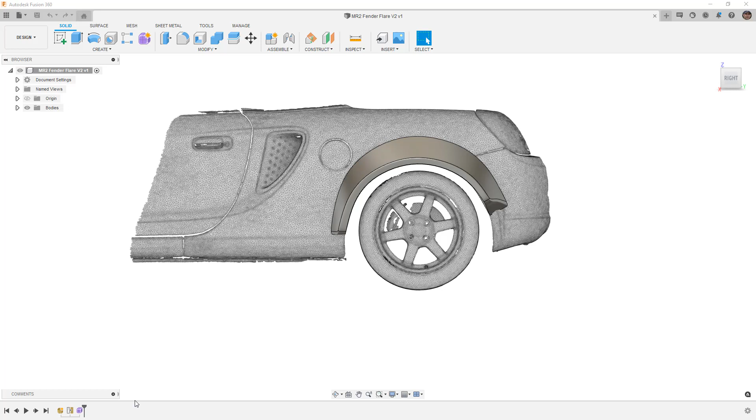In the last video in this series, we created a fender flare using Fusion 360 forms. Now, this fender flare was meant to be inspired by the typical Rocket Bunny style, where the fender flare doesn't come all the way down to the bumper, it sort of ends and you can see the tire from the back. I think it's a pretty cool style, it's very unique, and of course a lot of people are copying it, so why not?

But now I want to talk about actually going a bit more extreme than that. So we're going to hide the fender flare that we created, and we're going to start creating one that is more in line with the entire fender.

Now, remember again that the stock body has this sort of fender flare, and based on the comments, people are telling me that this fender actually entirely unbolts, which is not common for a typical front engine rear-wheel drive car. This is all going to be welded on or part of the unibody in most cases. So having this be able to unbolt is kind of cool.

But what we're going to do is take a look at making another sort of stick-on fender flare. And again, full disclaimer, when I record these videos, it's generally my first time through, so I haven't actually modeled this yet. So we're just going to explore the shape, see what we can create with no idea or intention to start with. So with that said, let's go ahead and get started and create another form body.

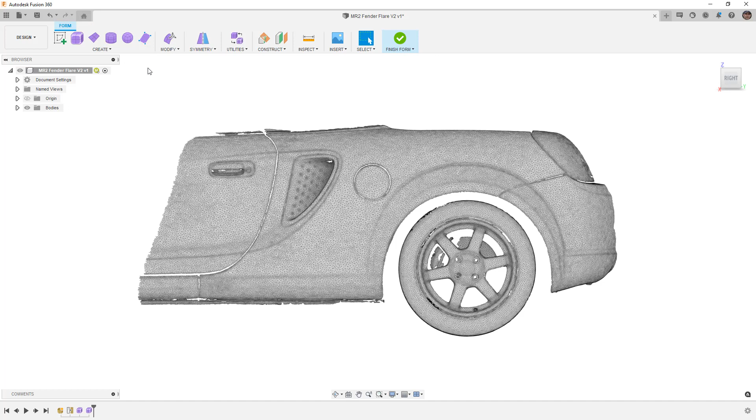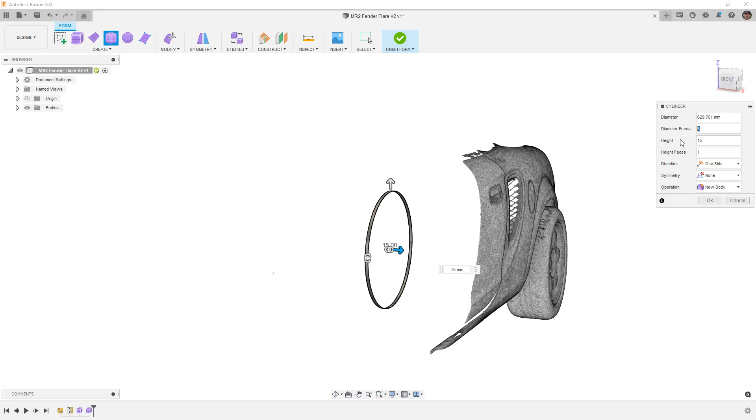So again, I want to start with a cylinder, and I want to build out the wheel arch. The same thing that we did on the last one, I'm going to set the height faces at 1. The height can be pretty small. I'm going to make it 15 millimeters. It doesn't really have to be very drastic, but I am going to increase the number of divisions. And instead of 16, I'm actually going to do 32. I'm going to go really, really high res on this one.

So from the front, I need to move that over, obviously, and I need to get rid of some of this. So I'm just going to box select, and move it over to the position we want. Now, since this is extreme, I'm actually going to take it out a little bit farther, and I want to make sure, at least for the time being, that I don't rotate this to match the tire. I want to leave it vertical. The reason is I want to make sure that I can make use of X, Y, and Z when I'm moving in plane. As soon as I start to rotate things, at least at this stage, it's going to make it more complicated.

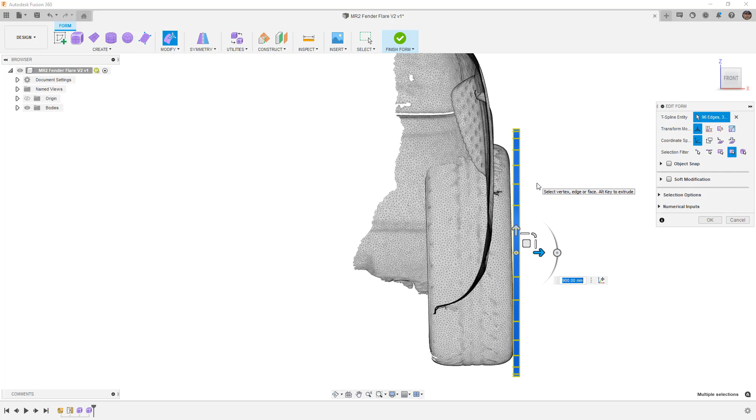But I am going to stick this one out just a little bit further. And of course, we can take the mesh and we can pull it out further. But again, a little bit more extreme, a little bit wider. It's going to accommodate probably like a 9, maybe even a 10-inch tire, very, very tightly tucked. So that gives us a good starting point. I'm going to click so that I can deselect that.

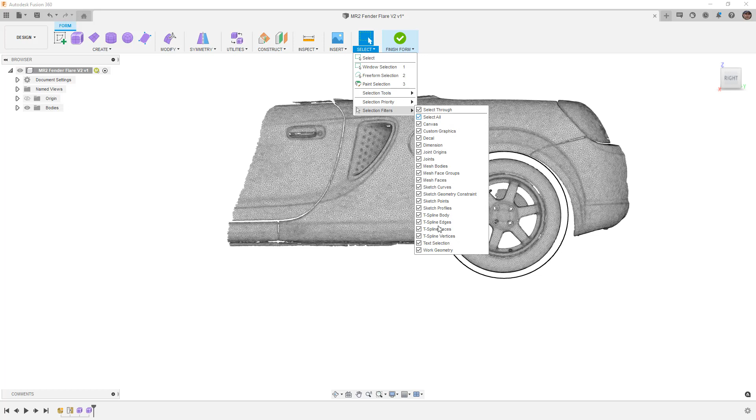And again, when we are selecting, we want to make sure that our selection filters and priorities and our tools are all based off of what we want to select. So if I get out of the edit form dialog and go to my filters, you can see that we have mesh bodies turned on, which means that we can actually select this. But when we go into edit form, the mesh body is not selectable. So if you're trying to pre-select anything, make sure that you expand and go to your selection filters. When you're in the edit form tool, you're not going to be able to select the mesh body anyways, but just keep that in mind.

So on this one, what I plan to do is come all the way down to where the side skirt or the sill would be. So we're going to come up to this seam here. And I think what I want to do is carry it around this intake.

I don't know if I'm actually going to incorporate the intake or not, but I want to go to this upper portion. I want to go around the intake and come down to here. On the back side, I still want to leave some of it open. I don't want to come all the way down to the bumper, so I might take this up to the body line here and leave the stock bumper. That's just my initial thought. I'm going to look at just the fender portion, and of course we could add or create another extra little piece here. Let's just see how it goes.

The reason we're making that determination is we need to figure out what to delete. So I want to select and delete that, and then I probably want to get rid of a couple more faces.

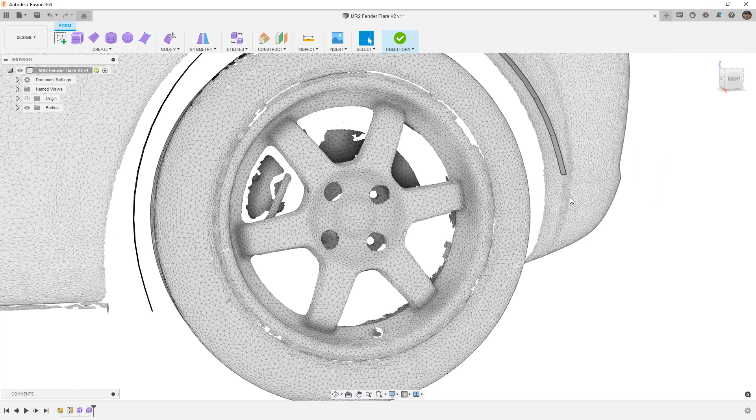Let's view this from the side and see where that lines up. It looks like maybe we can come to that line on the bumper. That might be a good line, at least for right now. It's a good idea for us to keep a little bit more and then adjust it later if we want to. So I'm going to go back to edit form.

Again, like we did before, I want to start manipulating the shape to be a little bit closer to the wheel arch. Generally I work in box display mode, at least at the very start of a design. For this, because we are dealing with a scan and I want to position the wheel arch in smooth display to match that scan, I am working in smooth display.

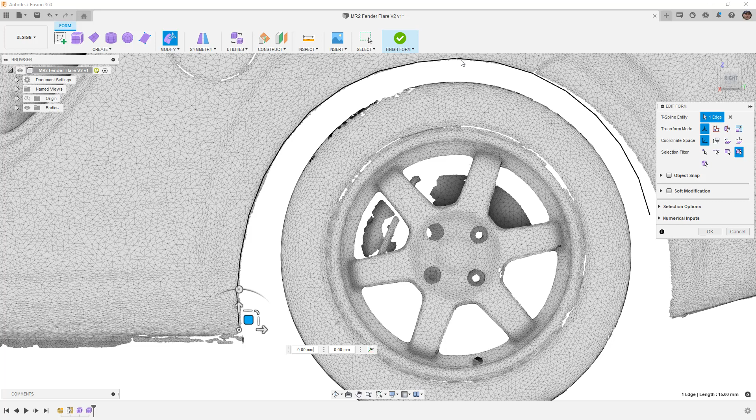It's not something I typically do, but to get the shape close, we want to use the smooth display now, and then we can always switch to box display and clean things up and make it a little bit more symmetric. It's hard to do right now with just this thin lip, and that's something we'll obviously need to spend a little time on. But this is a starting point, and we can always remove or add edges and clean this up later if needed. In general, if we were designing the car body from scratch, we would do an extremely low polygon count, extremely low face count, and then sort of add to it from there.

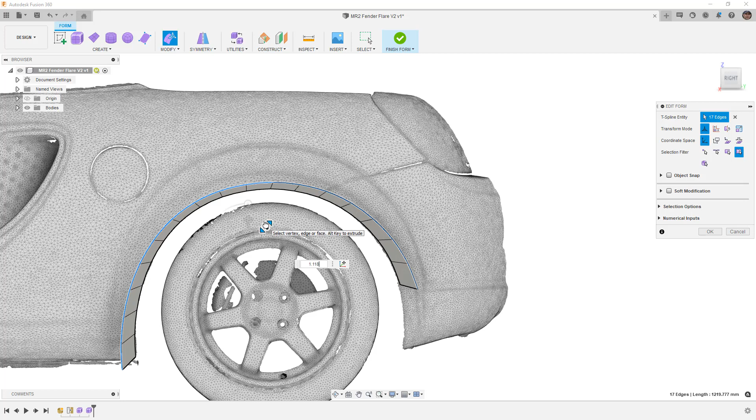Now that I got the starting position of where I want that wheel arch, I'm going to double click the outside, and just like we did before, Alt and Control on a PC, and it's going to be Option and Command on a Mac. I'm just going to pull that lip out, and I'm going to make it a little bit bigger than we did last time.

Then I'm going to continue manipulating these. Again, the intent here is to keep them a consistent width, and I also want to make sure they're pointing toward the center of the wheel. So that's going to be my reference for all of these edges. You'll note that as they start to point a little bit more extreme, the shape kind of works itself wider. It's not quite right.

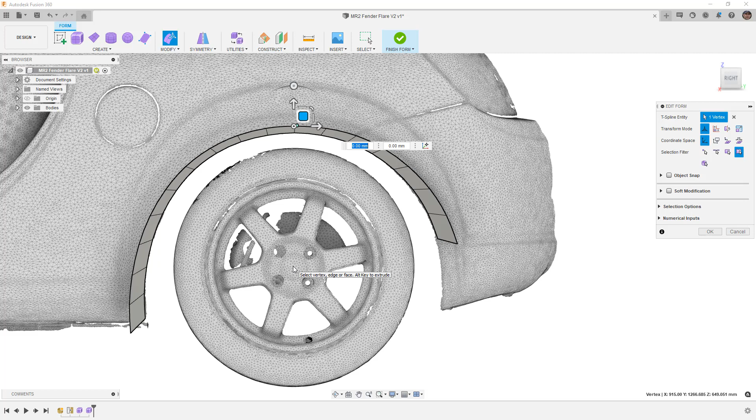Part of that is because when we're extruding, what we're doing is extruding from our selected edge. There is actually another way if we have a selection point that is in plane with the wheel. Let's go ahead and Control Z to undo and let's explore that.

So I'm going to create a sketch. I'm going to use the side plane, and what I want to do is just put a point where I think the center of the wheel is. So I'm just going to place a point right there. Again, in this case, this is the mesh where we actually raised the wheel up 30 millimeters to lower it, so that's about where I think that is. I'm going to finish that sketch, and notice that the sketch point is here.

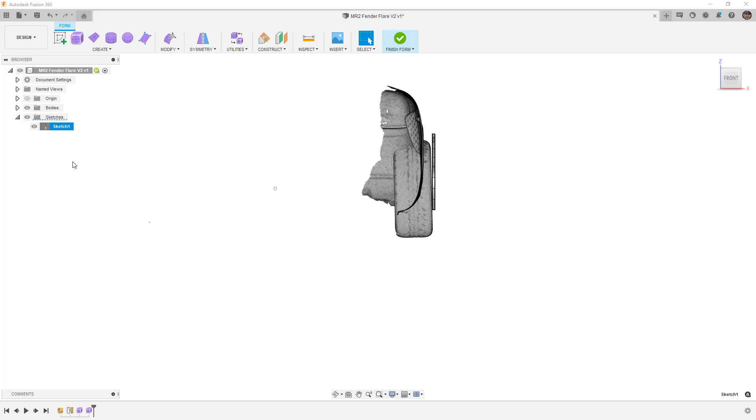So if we use this as our pivot point and we extrude out, it's going to completely go the wrong direction. It's going to go from here and go outward, so I actually want to move that sketch. We can do this inside the sketch as long as we right click and edit the sketch. So as long as we're inside of the sketch, we can move that point if we have 3D sketch turned on. I'm going to select the point and hit M for move.

And I just want to bring it to the location where it's matching the end of this. You can see it's 915 millimeters, that's where it's going to end up. I'm going to say OK and finish the sketch.

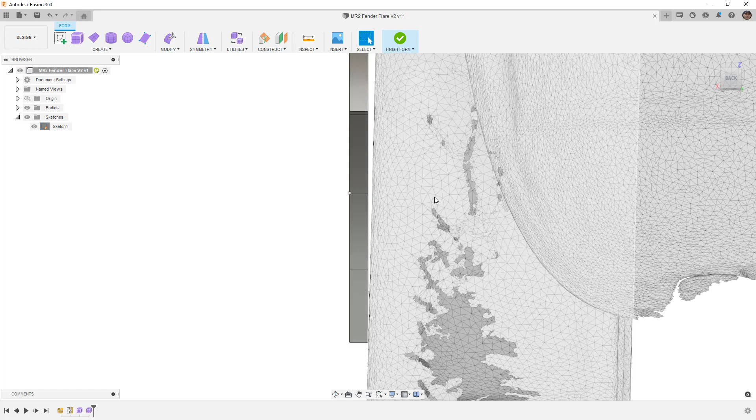Now theoretically, and this is the first time going through this, but theoretically if I set my pivot point there, I won't have to do a lot of post-processing on that extrude. So let's go to the right view and do Alt and Control. You'll notice it's kind of moving out how I would not expect.

So before I extrude, I'm going to set the pivot point to here. Now I'm going to hold down Alt and Control, and you can see now I'm getting that very smooth, consistent result, everything is pointing directly to that. It just saves me a little bit of time having to do it manually.

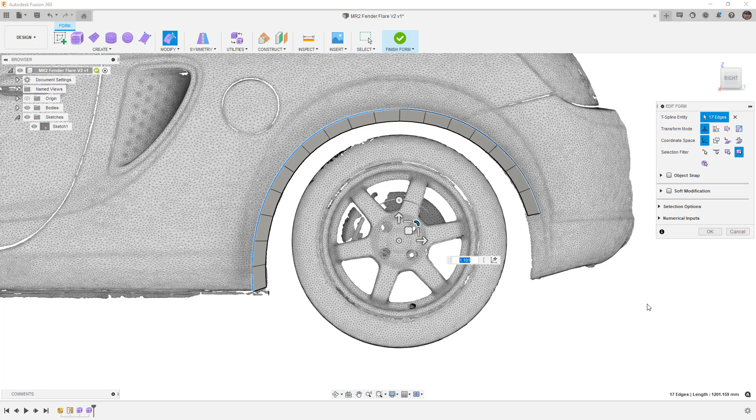It's more consistent. When we did it originally off the selection, you'll notice the upper sections were much thinner and these lower sections were quite a bit wider. So this gets me closer, and I can of course do some manipulation and get it more in line with what I want, potentially change the shape over here. But for right now, that looks pretty good.

And now we've got our lip. This is not to say we always have to have a lip like this - in some cases we might want to actually smooth that out and roll it. But almost every car is going to have some sort of crease here, and adding that extra detail and edges to control it this time is just more work than you need to do. So keep it as simple as possible at this stage. I know we've got a lot of divisions here, but keep it as simple as possible.

Now that we have this starting point edge, the way we did this before was we held down Alt and extruded it and built out our fender flare. That is not going to be the process this time, because we're going to have a more intricate shape. We need to determine if we just want to push everything out and maintain some of the stock detail, or if we want to make extra intake scoops or make it pretty wild.

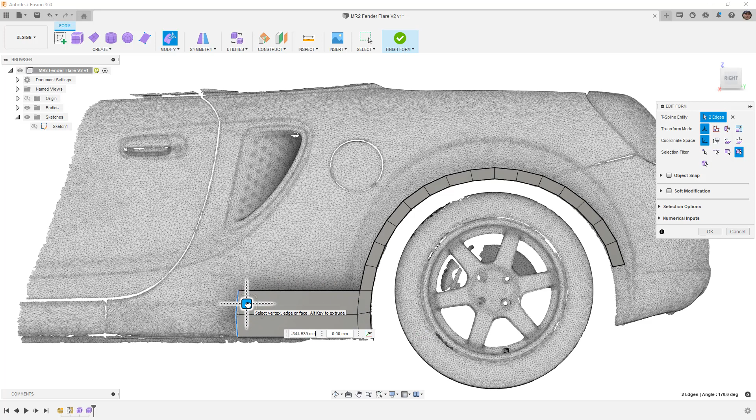So at this stage in the process, this is when I'm going to go into box display and begin building this out piece by piece. I'm going to take these lower two edges, select both of them, hold down Alt, and bring them forward. I'm going to place them at some point - I don't really know what the shape of this is going to look like yet.

Before I finish this up, I'm going to start to scale them to get them in vertically. One of our subscribers mentioned that you can just hit 0 in the dialog box, which is something I honestly have never really done before - I've just manually scrolled it close. So just hitting 0 will get you close to that value and get it actually vertical. That's pretty cool, you can go ahead and do that.

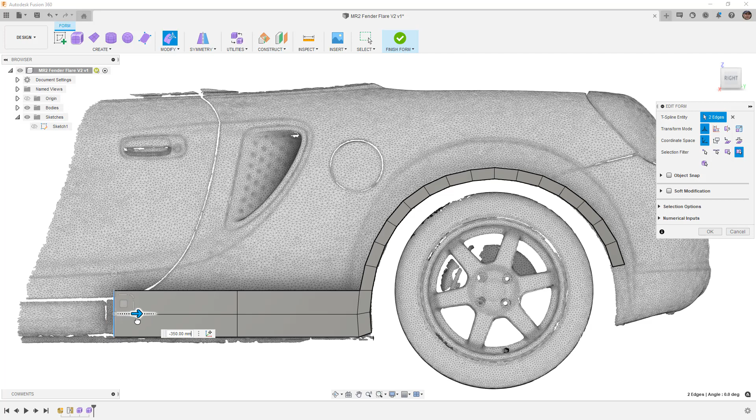Next, I'm going to hit Alt and do this again, just extruding it forward, and go pretty close to that edge there. I just want to bring it close to that edge, and that's going to be sort of our defining shape.

Before I start to scale this stuff down and fit it to the door, I want to go to a top or front view, and obviously that is not going to work - we need to pull it in closer to the body. So I'm going to take those edges and pull them in fairly close to the body. Again, it doesn't have to be perfect, but that looks pretty good. I want it to be just a little bit in front of the mesh. And then we're going to take this one as well.

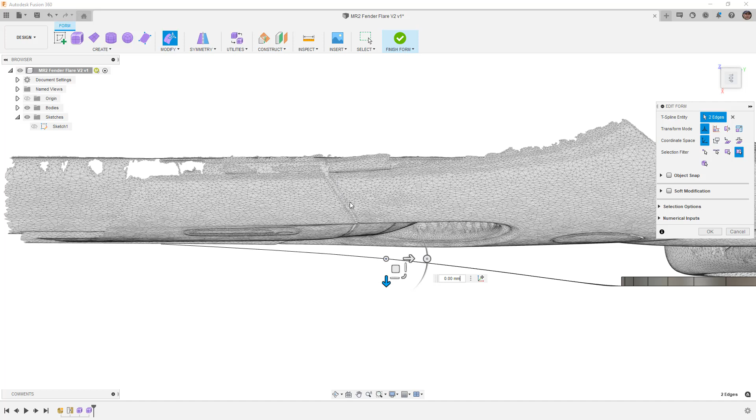What I'm looking for here is really going to be driven by how we want the shape of the fender. In a lot of cases, I say we always want to maintain those straight lines, going from one point to the next to maintain those lines. And while that's true, in this case, when we're looking at it from the top, what we're doing is figuring out how we want to flare this out. Now we're going to be going from the door seam, and we're going to be building out.

So I want to keep it kind of close to the body here, not exactly in line. And then I want it to begin to sort of flare out and widen, have it be a much more drastic look. So that's a good starting point there.

The next thing I'm going to do is select both of these edges and begin scaling them down. Here's another thing we need to be mindful of: if we want them to be scaled from the bottom, if we want to keep that bottom position exactly the same, this is the time where we reset our pivot. We put the pivot at the bottom, and then when we scale them, they're just going to move down vertically. If you need to keep the bottom, the top, or the middle at a specific location, you just set the pivot point there.

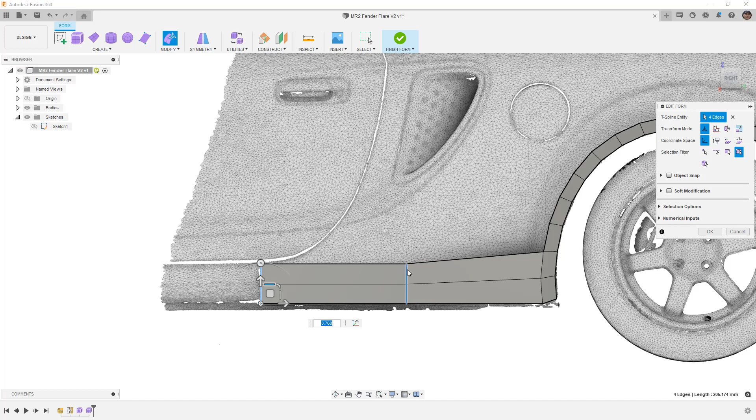The reason we would want to scale them vertically or make them shorter vertically is if we want to have a more drastic side skirt or something. I'm going to assume in this case that we're just going to keep them about where they are, but that's why we would do that.

As we look at this from the front, notice that this bottom edge is quite a ways away. So I want to begin pulling this in, and note that we are starting to make that shape as it flares out. And the center one here, I'm going to view this from the front, and I want to pull this one in as well.

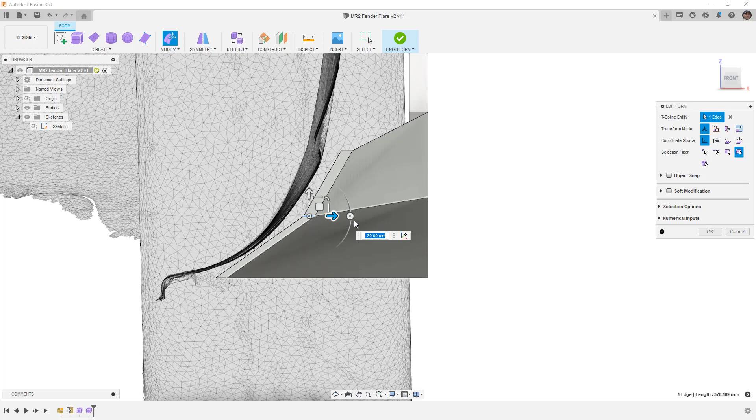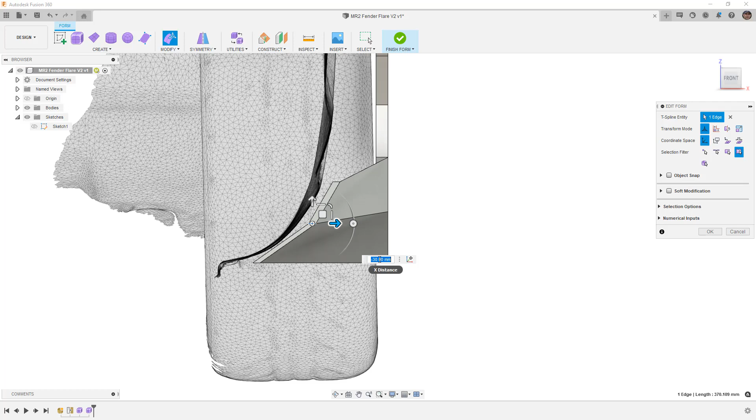One thing to note is when you're using just the arrow, it's going to snap at certain increments. So if we're looking at it in this view where we've zoomed in about this much, it moves every 5 millimeters. If we zoom in further, it moves every 1. If we go further back, it's going to move in 10 millimeter increments at some point. Just keep in mind that your zoom level is going to determine that. It's not true if you're moving in plane, but if you are moving here, then it is going to determine that. Of course, you can manually enter it here, or go into numerical inputs and add it there as well.

But we're going to be doing this manually. Let's take a quick peek at smooth display, and you can see that it's sort of rolling out. We will add some more detail on the bottom of this, but you can kind of see it's rolling out.

Because of the curvature we added at this position, I'm going to reset my rotation to that point by clicking the middle mouse button while holding down Shift. You can kind of see it's twisting and flaring out. At this stage, we're just looking for rough shapes, rough concept shapes, so don't get too hung up on the details and how smooth everything is. Just remember that we're building these out.

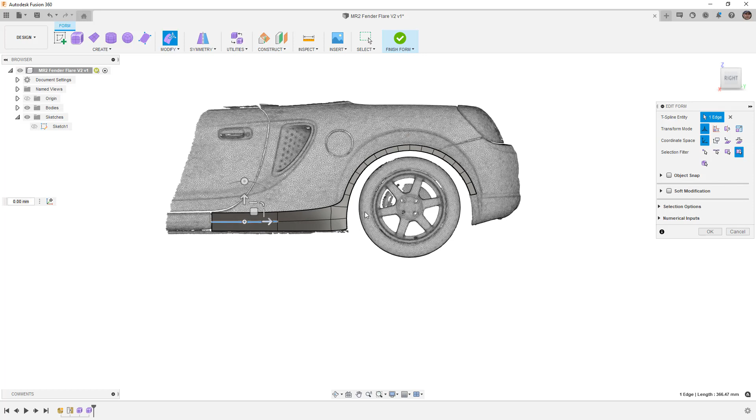Now at this stage, we need to figure out if we're going to continue to extrude away from our lip here, or if we want to actually create some new faces and eventually add them here. I think the best thing for me to do is to start building some new faces and not try to extrude all of this out. You can do it both methods, either way is perfectly fine. We could also start with a big broad shape and then begin dividing it up. Again, any of those are going to be fine. It kind of just depends on what you're comfortable with.

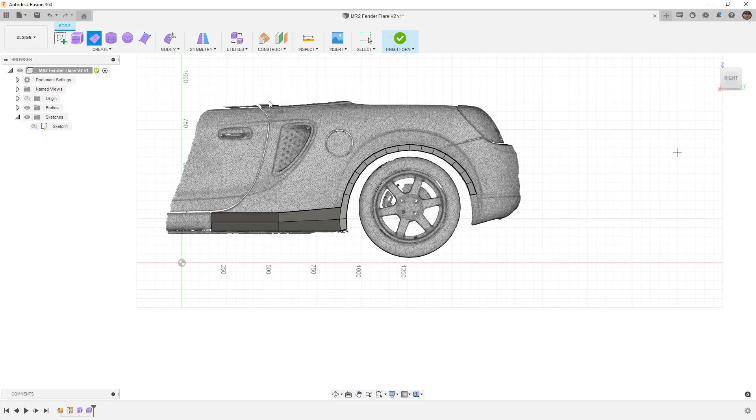So for me, I'm going to start with a plane. Actually, you know what, let's cancel that. I'm going to cancel the plane and start with a face instead. The reason I want to do this is because the face will actually let me snap to the mesh, which is a pretty cool feature. So using face, making sure that we have object snap on, notice that there's an offset amount. What I'm going to do is start building directly on this mesh.

So I'm going to come to here and I'm going to just bring this out. I don't know the number of divisions I need yet, so I'm just going to sort of start building this. I'm going to come from here and keep building out at least a few faces.

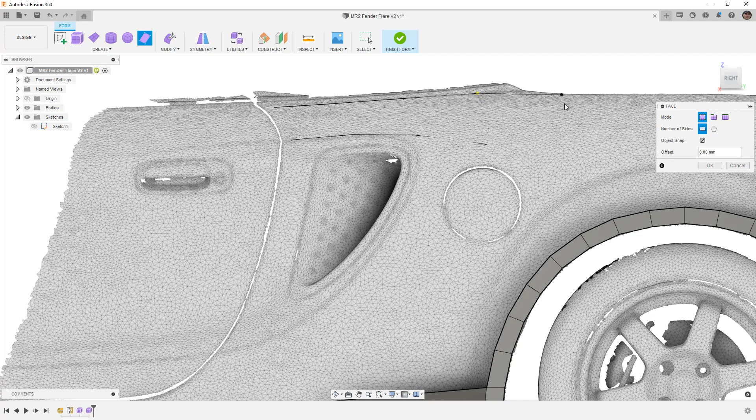I know that I want this shape to start getting larger here, and that's going to be a product of how we're going to control the curvature. I'm going to come to this point, come down a bit further, find that point there, and I'm going to say OK at that stage. It's hard to tell because it is hidden a little bit in the mesh because we don't have curvature to work on that.

But now we're going to go to modify, edit form. I'm going to select this body. I'm going to go to a front view. And even though I built it directly on the mesh, I'm just going to pull it out a little bit so that I can see it and go back to my multi-selection. So again, this is a quick way. That way we don't have to create the plane and then move it into position and reposition it. Using the face option when we have a reference mesh can be a little bit quicker.

So now we've got the rough starting shape up here. This one's in box display, this one's in smooth, so I'm going to use Alt and 1, and that way I am in box display on this one as well. Again, don't worry about the fact that it's going underneath the fender. We're going to take care of that when we add more divisions to the shape.

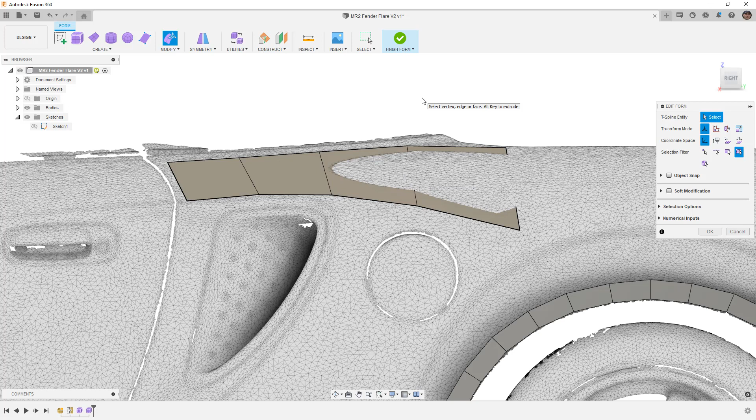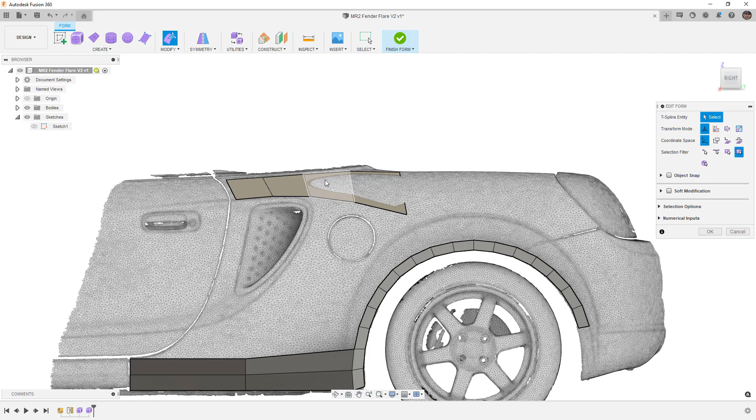So here's where we need to start thinking about what we're going to do with this shape. We got these little pieces here, which eventually, again, I said in this version, I might just do a bolt-on or a stick-on fender flare. And this is one where you sort of trim away and you leave a little bit. Just because it's going to be a little bit more difficult for us to create one that's attached. And we certainly can. But again, some of the bolt holes are here, but I don't really know how that interface happens at the top.

So most of these were Spyder or hardtop convertibles, and I'm sure that there's some hardware underneath this lip here, but I don't really know how that all works. So I'm just gonna work off of the scan that I have here, and I'm gonna keep building. So we're gonna carry this down. We're going to bring it down and start to build out where we're going to attach to the body, because that's obviously where we need to meet the body lines and match them.

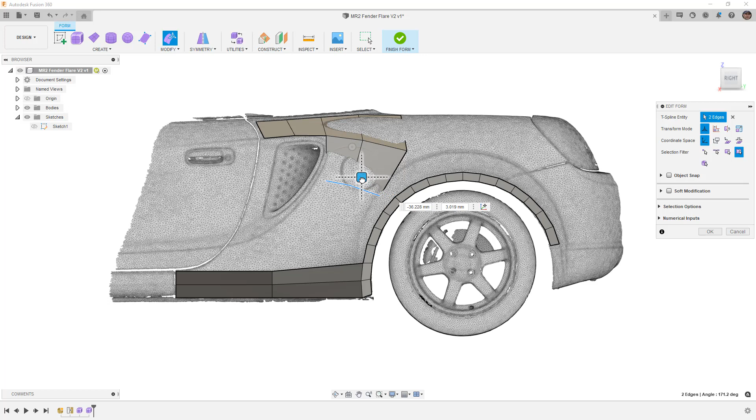So I'm going to start with these two edges, and I'm going to hold down Alt, and I'm just going to extrude them down. And then I want to scale them in a little bit. I'm not worried about pivot points at this stage because I don't really know what the shape is going to look like. And I'm also not going to be too concerned about just moving in X or Y or Z. I'm just going to begin getting it close, because remember, we're going to have to use pull to actually get this in the right position.

And I think in order to match that shape, I know that I'm going to need more divisions. So I'm just going to go ahead and make that call now and put this about where the factory wheel arch is. I'm going to take these two. Let's go ahead and extrude this down.

Another consideration that we should be thinking about at this stage is how and where it's going to attach to our fender. So obviously we have a lot more divisions on this lip, and that's eventually what we're going to get to on the shape of our body. But at this stage, we obviously don't have that. We would need to divide this one up here, and then we would need to bring this down. But the problem with that is it's going to be much harder for us to create the general shape that we're looking for. So even though we know that we're going to need more divisions, at this stage in the game, we're going to keep it very general.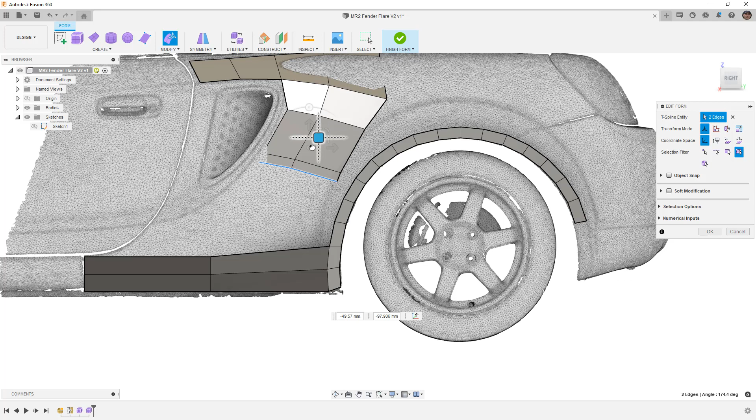So we're going to extrude again. This one you can see is starting to go into the body. So I'm going to switch to a front view, and I'm going to just pull it out a little bit. Note that some of these edges, like this edge, could go back. This vertex could go back because the fender's rolling back. Again, very general shape. We're not getting super detailed at this point.

But as we start to get down, this is the stage where we really, really absolutely have to start thinking about the layout of all of these different quads. Eventually we're going to have to probably have some triangles somewhere. But at this point, we need to think very clearly about how we're going to end up transitioning this forward.

Because if we just take these two edges and we extrude them forward and we rotate them and we scale them down, we can begin to sort of create this shape. But then we have to begin to really think about how it's going to connect to this and how it's going to connect to this. So there are two options. I'm going to just go back to this point.

There are two options. One is that we can take this one straight down, which means that this vertex will connect here, this one will connect here, and we'll split this one in the middle. And then we'll have to split this down the middle, we'll connect there and there. And then we begin extruding forward. Now what that means is we're going to have a star point. We're going to have 5 intersections that happen here.

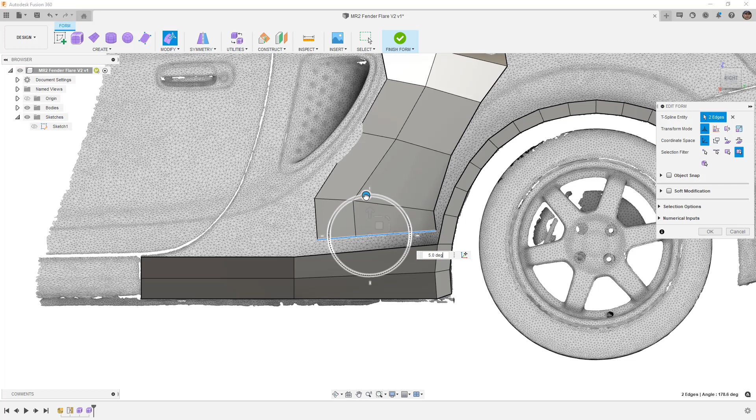So this is a very blocked out design, and honestly at this stage I don't have a vision of which one will be a better choice. So because I don't really like twisting these shapes, what I'm going to do is I'm just going to carry this down. I'm going to sort of scale it to get it close, maybe rotate it a little bit. But I'm going to assume that then taking this face and extruding it forward is likely going to be the better option for me. I don't know that, and that's just one of those design decisions that you are going to have to make along the way.

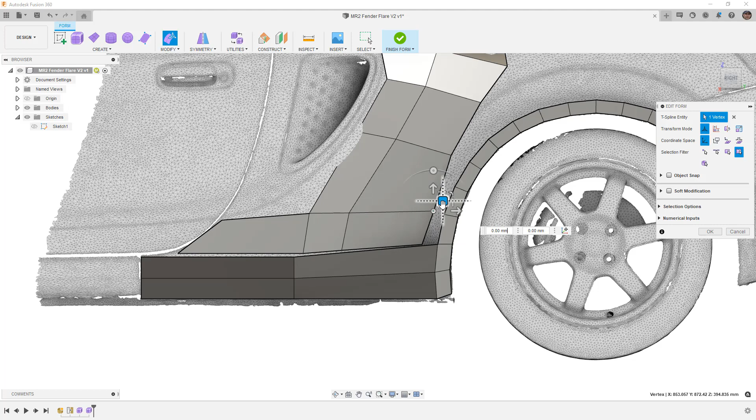So not knowing that at this point, I'm just going to make the call, make the decision to go forward with this method. Now, it might bite me later, but I won't know until I try. So now we've sort of got the general shape of this, and you can see that we're sort of building it and we're working on the patch from the side. Now I want to begin to sort of get some of these edges where they need to be. So I'm going to begin pulling some of them out. Again, very general. We're not getting real specific yet. We're just getting them about where they're going to end up, so we can start to visualize this shape.

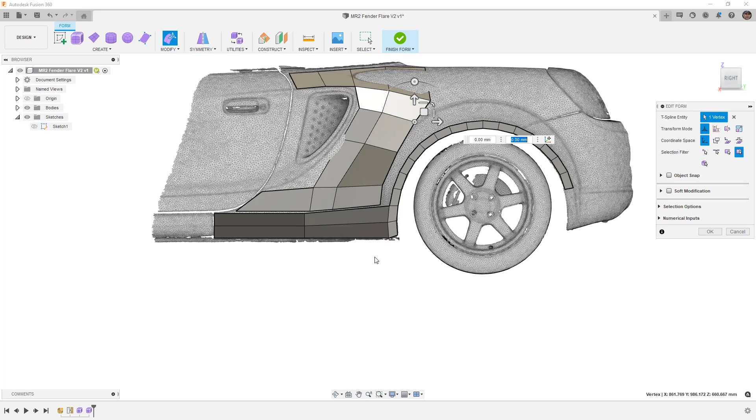I'm going to scale these together. Again, just get them kind of close. I'm going to scale them vertically. And what's going to happen is we're going to start dividing this up once we're happy with the shape. So we'll put a division right in the middle here. We'll put one right in the middle here. And then this vertex will connect here. This vertex will connect here. And we're going to end up having that star point because we're going to have to sort of change directions.

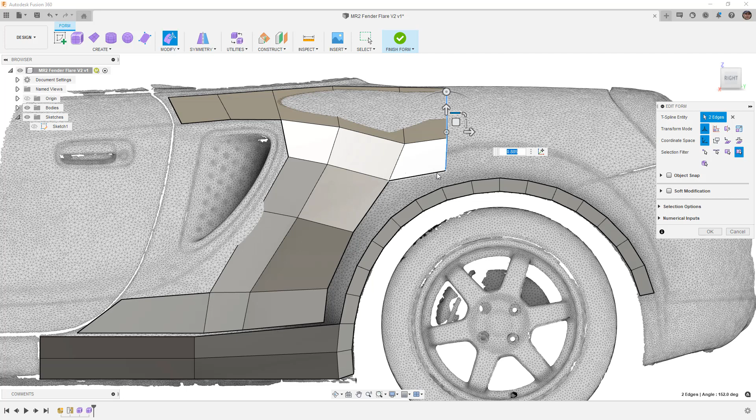The other option, or the other thing that we need to consider, is we might have a patch or a face that's 5 sides, so an n-gon, or 3 sides. We might have a triangle in there. Now, the reason that we would do this is, we just kind of have to think about how the shape is going to progress. We're not quite to that point yet.

At this stage, I'm going to rotate around to the back. Notice that this stuff is still very close into the body. We only really need to keep it up close to the body here. So I'm going to begin taking this edge and this edge from the back, and I'm going to start pulling them out. I'm not spending a lot of time at this stage really worrying too much about exactly where everything is, because it's messy at this point. And the reason it's messy is because I don't know what the shape is going to look like.

Once we're happy with the shape, that's when I'm going to start to take things like this vertex and I'm going to pull it up, and I'm going to try to get more of a straight edge here. And ultimately, what'll probably happen once we're happy with the shape is I'm going to end up deleting some of these edges and just adding ones back in that I know are very clean geometry. But again, right now it's the concept phase. In the concept phase, it's going to be messy. We're going to play around with the shape a little bit.

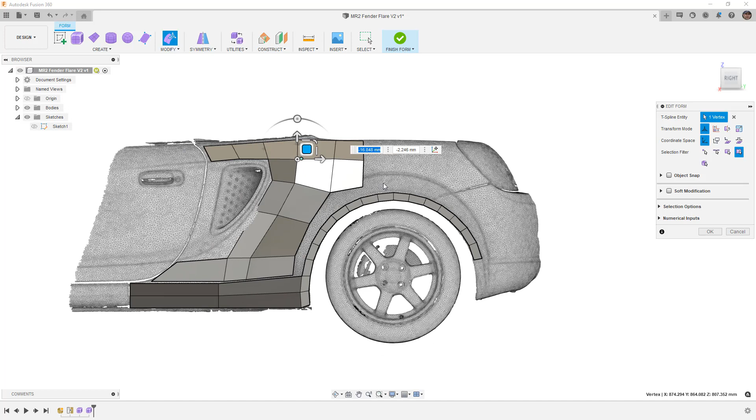And if we didn't have the scan data, if we weren't building off of an already pre-existing car, then the process is different. So I think it's important that we make sure that that's clear. If we were designing this car, we would have much fewer patches, much fewer faces, much fewer divisions at this stage, and we would add them in later. Because we already know the shape of the car, we know what we're attaching to, that means that we've got a little bit more to start with.

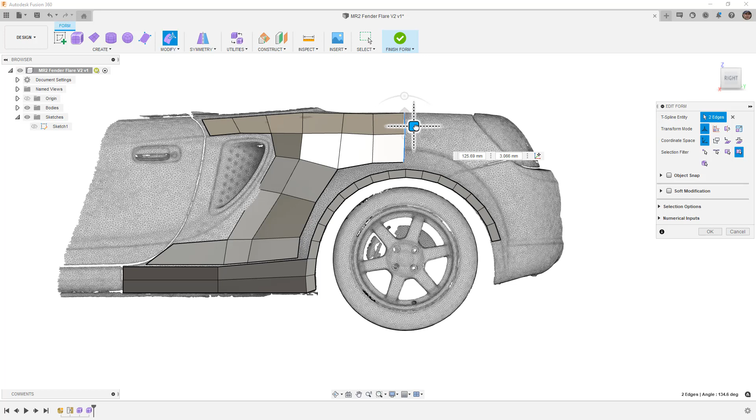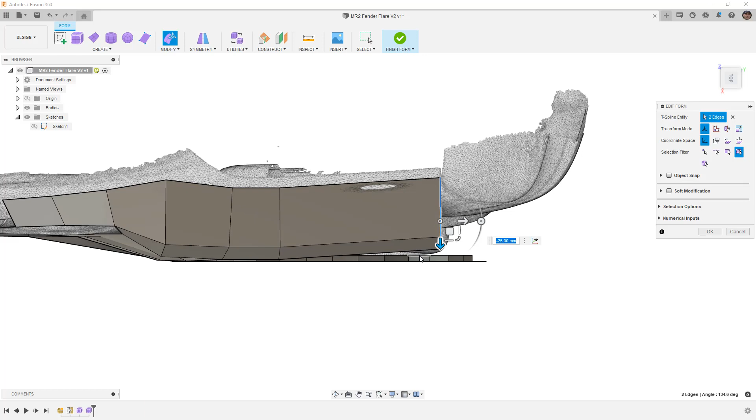So next, I'm just going to keep carrying this back. And again, you'll note that at this point, I didn't use just along Y. I'm just bringing it back. And I am keeping in mind where these things are going to connect. So remember that the broader the shape we have, the easier it's going to be for us to control. And then later on, downstream, we'll come back and we'll add a bit more to it. So for example, this edge, I'm going to pull this edge out. Again, keeping with the fender flare, but this one goes back toward the car body. Big, broad shapes, and then we'll divide them up later once we're happy.

And actually, with that in mind, let's go ahead and go back to a right view. I'm going to take this edge, and I'm going to delete it. And the reason I'm deleting it is because this is a much cleaner shape, and I don't need to worry about all those divisions. So if I try to make this a smooth display, we've got some pinching going on here because we need some more detail, but we can kind of start to see the shape building out. So we rotate this around, we're flaring out, and we're starting to build the rest of the shape.

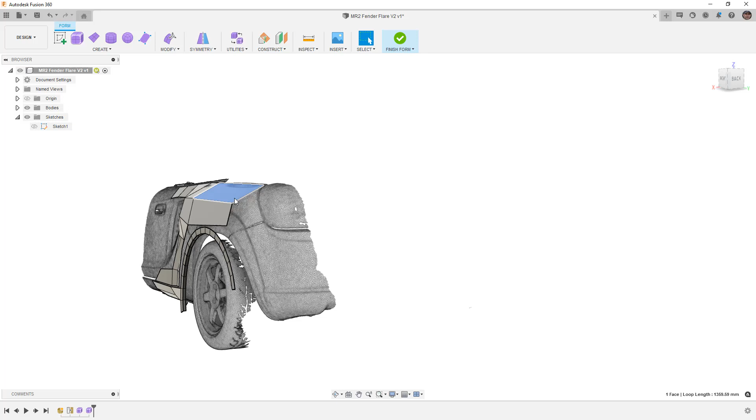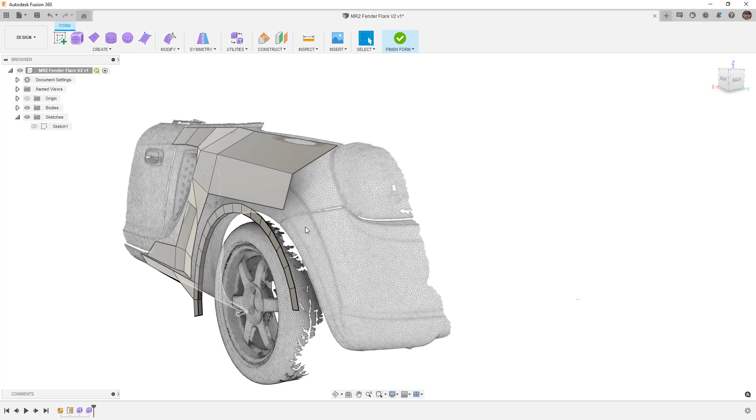As we get closer to the back of the car, we need to think about where and how it's going to terminate. So if you look at some of the DTM cars or some of the old race cars from the 80s, especially Porsche like 924s, they had these massive over fenders, and they still had the stock body underneath, part of the homologation rules, I think. And so, you had the original taillight, and then you just sort of had this big opening in the back. And I kind of like that look. I'm a fan of the cars from the 80s, the big boxy sort of flares and that sort of design aesthetic. So I'm probably going to continue on with that.

So we're going to have this big over fender that's going to connect back to here. But then we're probably going to leave it open at the back so we can kind of see inside of it. Again, just a design aesthetic thing, just from what I like. Obviously, if you want to connect it back to the body, you do something very similar like this.

So we're getting closer, and what I want to do at this point is I want to carry this edge, the shape of this edge, I want it to be more in line with the taillight. So I want to select it, and this is one of those cases where we are going to reset the pivot point to the top, and then we're going to use rotate and scale. And what I'm looking to do at this point is I'm looking to rotate it and keep it so that this point is where it stays or where it's supposed to be.

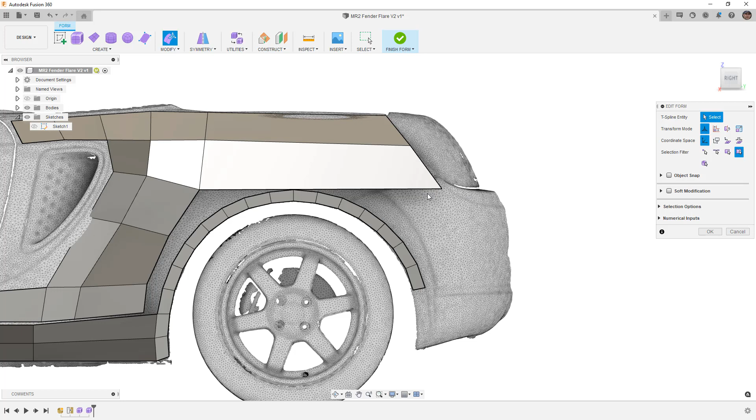And then I also want to try to make sure that this is fairly horizontal. So that looks pretty good. Obviously, with no divisions here, we can't continue to extrude down, but the shape at this point is starting to look pretty good. I like the shape. I like where it's going.

Now I want to spend a little bit more time fixing this shape here before I start to add more divisions. And a way that we can do this is if we're happy with this front edge, we can go ahead and double click on this and simply delete it. Now, if we double click this edge, or if we make some selections here, it's a little tricky because this edge doesn't carry all the way through, but we can come to insert edge.

I'm going to put it at -0.5. And it looks like we're going to want to select this edge here. We're going to have to do it manually just because of the way that the loop is laid out. And we're going to do a simple single insertion. And you notice it didn't work. Let's try again. Let's try insert edge. Let's try if we do +0.5. Okay, now it's showing it there. So now we've added one that's exactly in the middle.

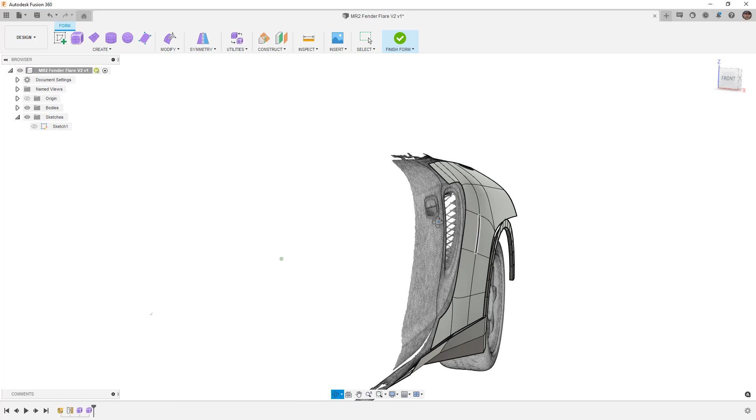And what this allows me to do is go to insert point. And I can go from here and I can find the midpoint of that edge. And I can repeat that process down here and just find the midpoint and say, okay. So that was a lot easier than us spending the time to try to get it nice and even. And this will give us a better result, honestly. The smoothness that we'll get from this will give us a better result. Let's go ahead and go back to box display. I haven't saved this, so let's do a save, make sure we don't lose anything.

So as I step back and look at this, I think that this edge needs to be higher. So what I'm going to do is I'm going to take this one and I'm going to delete it. I'm going to take this edge and just move it up vertically. And that's about where I want it. I'm going to reset the pivot point to here. Then I want to scale it down so that it matches the taillight shape pretty good. And then I want to go to insert point, and I'm going to go from here to here.

And that doesn't look very good. So I want to actually take both of those. I'm going to delete them. And then I'm going to go insert point from here, and I'm just going to go straight across and add that back in. So again, deleting and adding those edges and the insert points are going to be important.

So there's a pinch that happens here. And again, when we look at the reason that these happen, it's just because at this point, we don't have enough additional geometry to help control the curvature. So we need to divide this up and we need to clean it up a little bit more. But I think before we get into that, I want to start to try and connect it to the rest of the car body. And I think that's going to be an important thing at this stage.

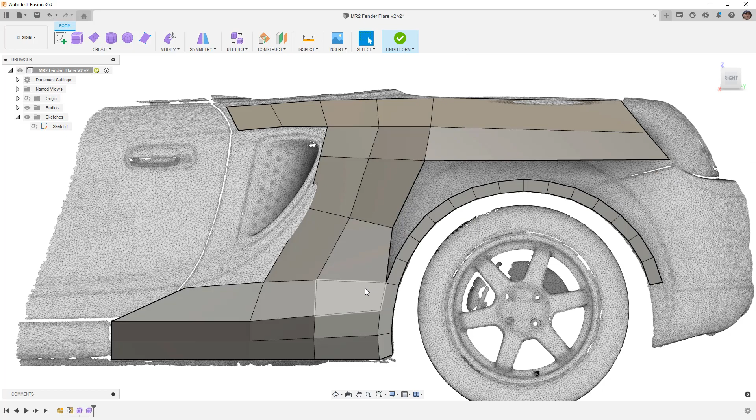So I'm going to insert an edge right in the middle. And then I'm going to start to use weld vertices. So I want to bring these out to the skirt where it goes. And I'm going to take this one here. And let's go ahead and take this one to here. We'll take that one to there. And we're going to stop there. Now this is probably going to prevent me from going back into smooth display mode. No, it still is able to do it. So now we're back in smooth display.

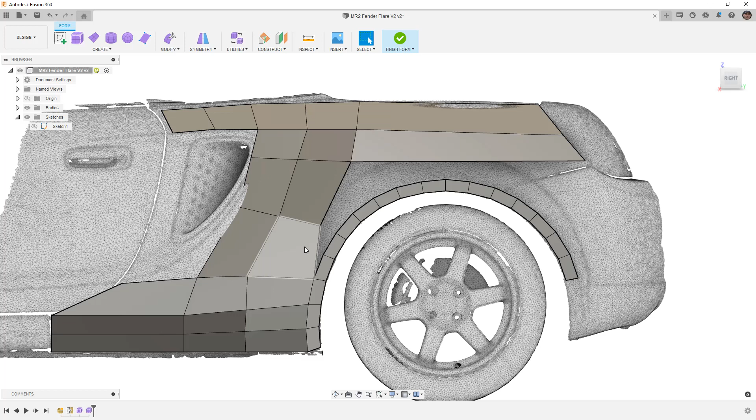We need to work on everything else that connects this together. So this section here, if we're happy with the shape, what we want to do is we want to use insert edge exact. If we think that the shape could still use a little bit of work, then we would come back and we would just use simple, and that would be fine. But I'm going to continue to work my way around the fender and figure out where things need to be.

So insert edge, I'm going to go here, and I'm actually going to do a simple on both because I know that I'm going to need more divisions up here, and we'll say okay. Then we'll go to modify and weld vertices.

Some of this doesn't look great. If I go to smooth display, it's probably okay, but obviously it could use a little bit more work. Remember, we're just roughing out the shape at this point. Don't be too concerned with how that looks. If you want to fix any of these internal edges, then again, what we can do is we can just delete them, come back and use insert point, and then use the surrounding vertices to help connect them.

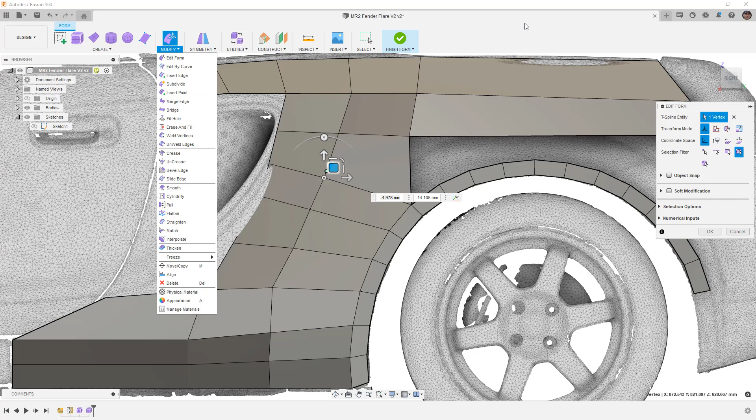I think this vertex needs to go down a little bit. This is one area where programs like Blender have Fusion beat, because you can take that vertex and you can slide it on an edge. Fusion 360 has modify and slide edge, but at least at this point, it does not work on a vertex. So we do have that limitation there.

Okay, so now we're starting to get some of the shape built out. I'm going to go ahead and do another quick save to make sure I don't lose anything. As I'm looking at this, the next thing I notice is I think I really want to pull this down a bit more. Maybe take this vertex back out, try to keep that straight line from the side. Again, we're going to end up pulling all this to the body, but I think that's going to allow me to build out some more of this shape.

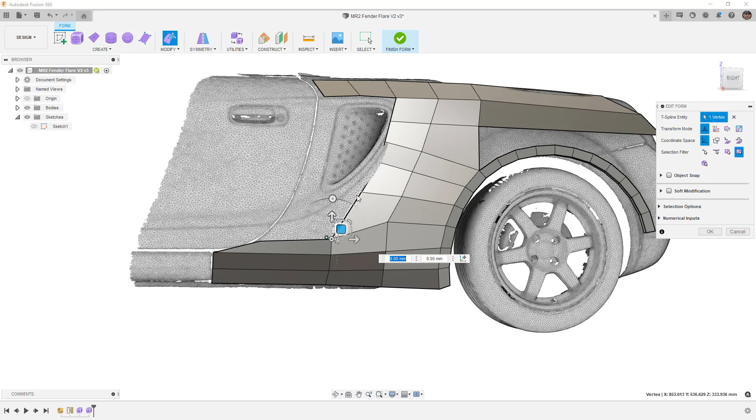So from the side, I'm going to start to potentially modify these vertices. And again, using things like scale are going to be really important to keep things consistent. At this stage, I'm still kind of concepting because I don't have a good idea of what I want this to look like. So I'm still sort of playing around with the shapes and I'm not too concerned.

But then I'm going to take this entire thing and I'm just going to extrude out another loop. And I'm going to do this by scaling it. Again, we could use like reset pivot point. We could work on the patch layout. But again, I'm still kind of working on the concept and I'm not too concerned. But this is going to give me an extra edge or an extra level of control to kind of match the car body.

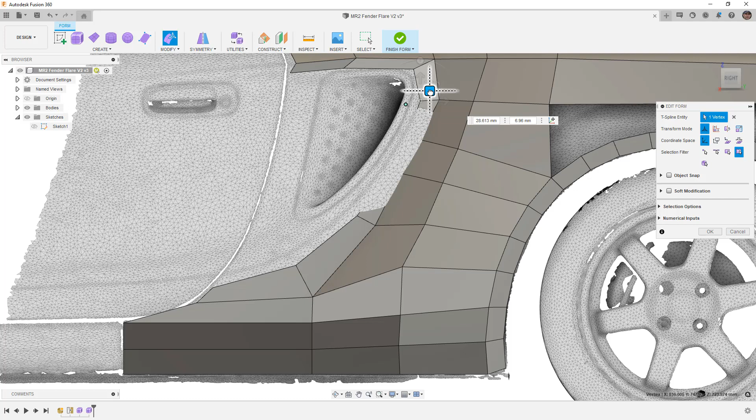So if you have trouble seeing this, you can always rotate and pull these out in front of the mesh in this case, but I kind of know where they are, so I'm just going to keep working on moving them around little by little. This is probably more fine detail than we really need, but again, I want to go ahead and just manipulate what I can and add that level of control.

So we're going to start building that flare out. And what this lets us do is take this loop here and pull it away from the body. And what this is going to allow us to do is create that more dramatic sort of intake scoop look. So we're going to go around that intake scoop and sort of accentuate that shape. We're going to sort of pull it out from there. And this allows me to sort of flare the fender out a bit sooner.

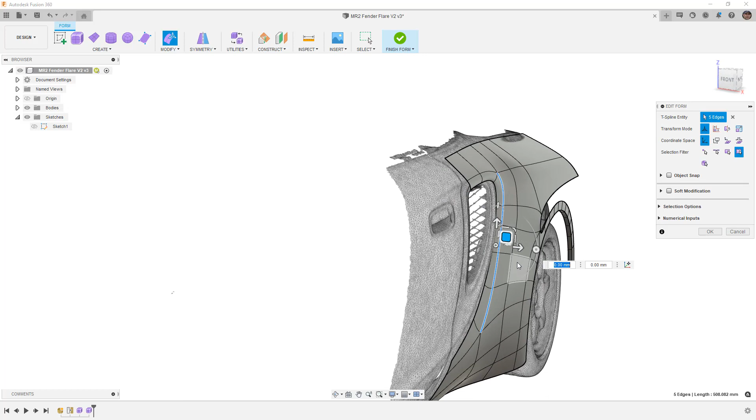So if we go back in box display, again, what we can do is we can take some of these edges and we can delete them. This might be good to view from this angle, and what's going to happen is that shape is going to sort of fill itself in. It's going to get smoother. And if we take a look at it in smooth display, because we have these T-points, things need to be fixed, but now it's flaring out a bit smoother.

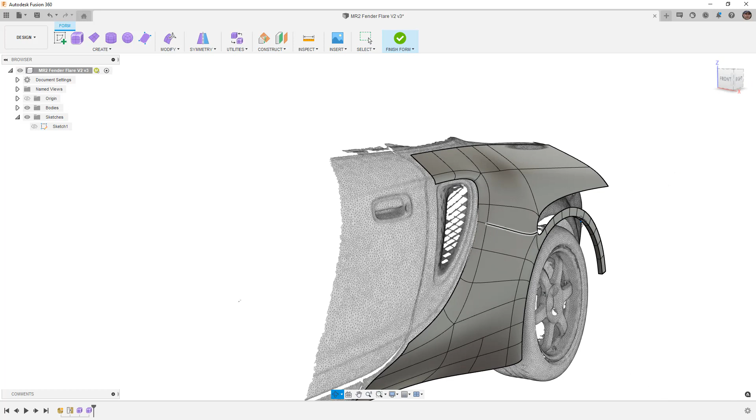And what I can do is I can go back and I can use insert edge in the middle to get some of these more symmetric. I am going to pull some of this stuff around before I do that. And hopefully it's starting to make sense when we're looking at the way that these shapes progress. You can see it's wider here and it sort of gets narrower, it tapers around this, and it can get wider again if we need it to. But you can see that it's very gradual. And the gradual transition between these is what's going to be important.

This edge right here, I might want to pull down just a little bit more. What I'm looking at here is these are all going to be a consistent width, but you'll notice that these taper out and get a bit wider. We could add more divisions and make these more consistent, and we might end up doing that in reality. But at this stage in the game, I don't necessarily know that it's needed, but you can kind of see how that looks if we bring these down and make them horizontal from where they're attaching.

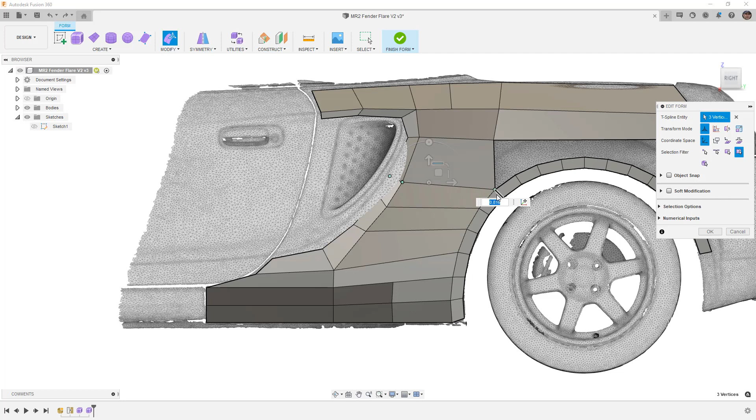And of course, we could do that by selecting the vertices and using scale. Let's go ahead and undo, hit scale, and you can see that we can use that. But it's going to move this unless you reset the pivot point there. So these are all little nuances that we need to be mindful of when we start these.

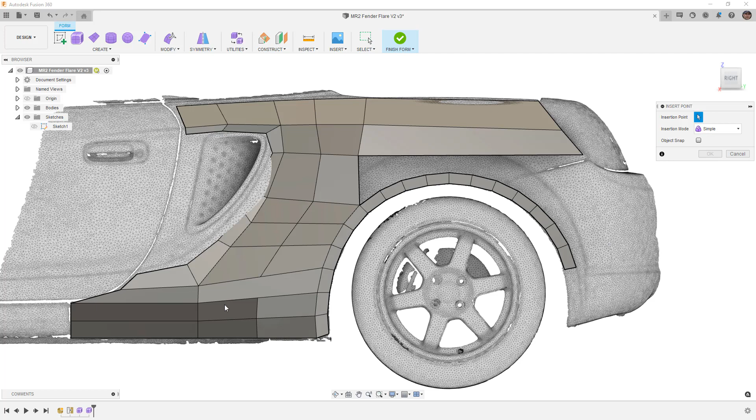Now we need to go back and reconnect this edge. So we're going to go modify, insert edge, pick the ones where we want to insert. We're going to do a single insertion, and I want to put it right in the middle there. Then at the very end, we'll use insert point to go between those, and we'll use insert point here. All right, let's take a quick look, smooth display.

Not too bad, could use some more detail work, but again, we're not to the detail point. If you have an idea of what you want something to look like, it's quite a bit easier. But if you're kind of playing around with these shapes, it takes a little bit for us to really work on it.

So I think what I'm going to do for the rest of this video, I don't think we're going to get this done in this video, but I think what I want to do is finish out connecting it to this portion. And then in the next video, we'll really focus more on the details, the higher level of details, the shape, the transitions, all those things that are really going to make or break this. Because otherwise, it's just going to look like you just took a big blob of clay and stuck it to the side of the car and just melted it. So we're going to add more detail. We're just not quite there.

So the next step in this process is, again, to sort of figure out all of these divisions. There's quite a bit going on here, and we're going to have to break this up and extrude all of these out. So I think what I want to do is skip these two right here, and then take two and make sure I'm selecting edges. I'm going to take those four and just extrude them up.

So I'm going to extrude them up, scale them so that they're horizontal. Again, we can manually enter zero. Then I'm going to say OK. And what this is allowing me to do is figure out where these divisions need to be.

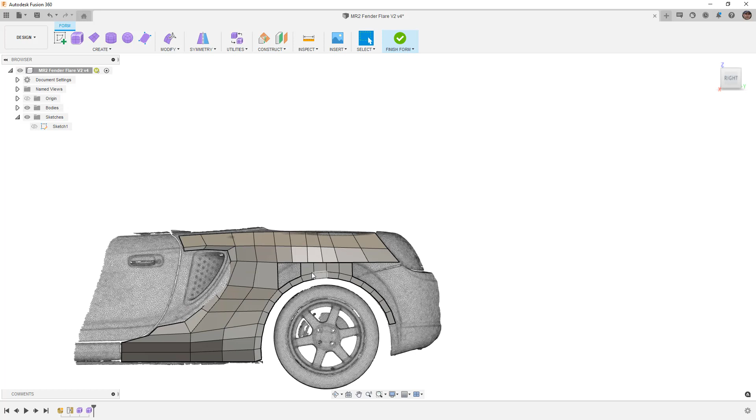The main reason you'd want to do that is because if you start moving these edges and vertices around, you're going to end up losing the shape. When you add them in and let the software push things where it wants them to be, it's much happier. The geometry is better.

Now we need to go back and think about our original design philosophy and the fact that we wanted these lines to point to the center of the wheel. That's going to be true for the vertex at the end of this as well. I'll try to manipulate this - note that this is almost a straight line to there. If I take this one, that's pretty close.

This one is going to be off, but we can slide that edge over. This one here is pretty close, but it needs to go to the right a little bit. And then this one here ends up going like that. So again, we're pretty close.

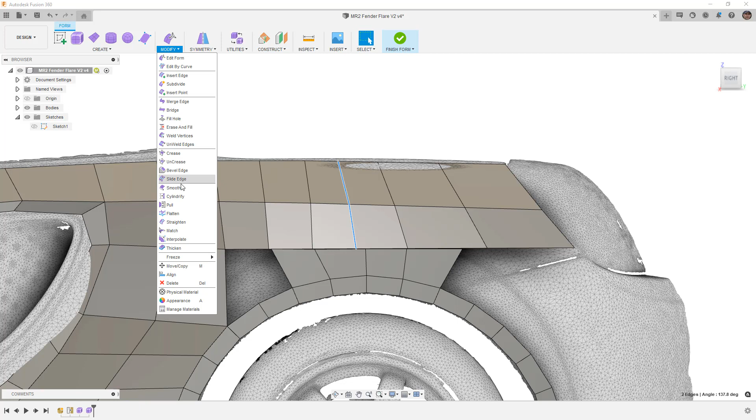The way we'd fix that is we can come in and use slide edge. Slide edge is a good option for this. We can figure out where we want that, and then place it there. This one here, I'll do the same thing - use the right-click marking menu and just repeat it, and we'll say OK.

So again, we're getting much closer. Now we can use modify weld vertices, and I'm happy with the location of these. I'm going to take the fender flare extension and go to that and that. Push this one over here, this one here, and that one there. All right, so getting closer.

We're going to go to a smooth display real quick just to make sure that looks okay. Once we're happy with the layout, we can always go back and delete edges and add them back in. Still very much a concept stage - we're just trying to rough out the shape and figure out what we want all the divisions to look like. You can already see it's taking shape and things look pretty good.

It's flaring out from the side skirt. You can see that this section all looks pretty consistent until we get right into these two faces here. This looks pretty good - I think that this edge I'd likely want to bring in a bit more.

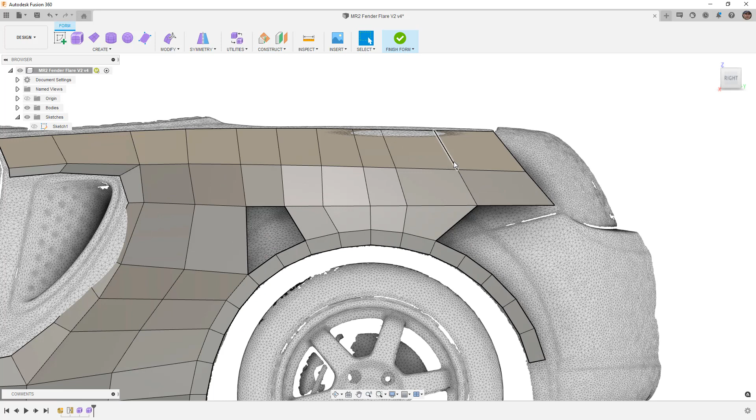We can do that by selecting it and going to slide edge. Even though it's attached to something, we can move it over until we're happy. It's really hard to see on the screen, and probably extremely difficult to see on the video, but it actually shows you a preview of where that edge is. Then we can just remanipulate those.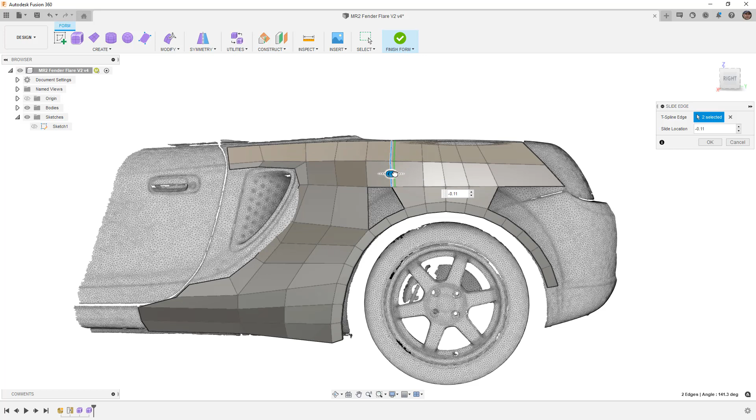Same thing with this one - if I'm not happy with it, repeat slide edge, move it until it looks like it's about in line where we want it, and then fix that. I'll do the same thing here. Just while we're here, let's go ahead and pull it over just a little bit.

Now I'm going to have to put another edge right in the middle, and then I need to fill this in. This can be done a couple different ways - I'm going to use modify and bridge. I really like to avoid merge edge - I'm not happy with the results.

I don't think it does a good job of putting the vertices together if things aren't really symmetric. So bridge, or manually extruding and using weld vertices, are usually my go-tos. It's not to say it doesn't work, but that's just me.

So I'm going to go from this edge to this edge here, and I need to make sure the number of faces matches the number of faces we're transitioning to. I'm going to say OK, and you can already see it wasn't able to cleanly make those work.

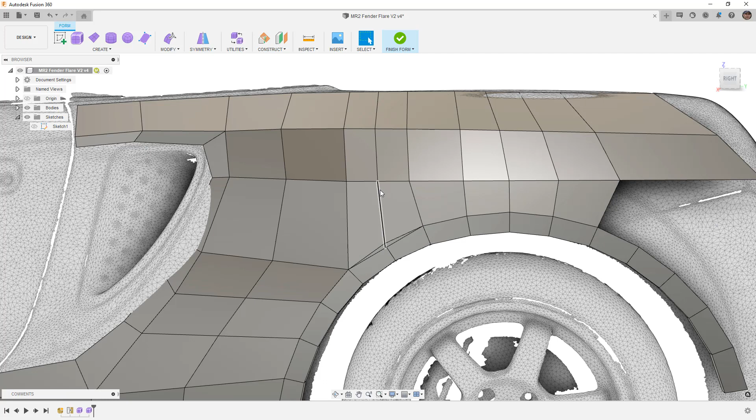So I do have to go in and say weld vertices. I'm going to take the one from the bridge and put it there, and then make sure these two are connected. If you box select and you get two selections here, then you'll know those two are sort of missing.

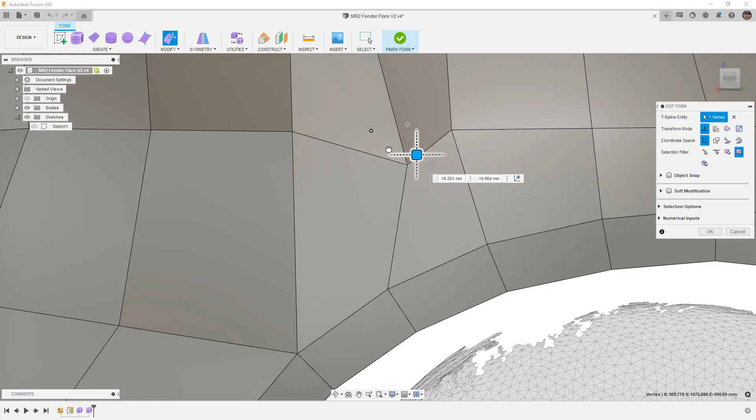Another thing you can do is try to move one of them and see if another one is left behind. It seems to be okay. So now we've connected that portion.

We need to work on this. As we look at this visually, what I want you to see is that these seem more bunched or pinched together, and these seem wider. So the transition really needs to be worked on in this area.

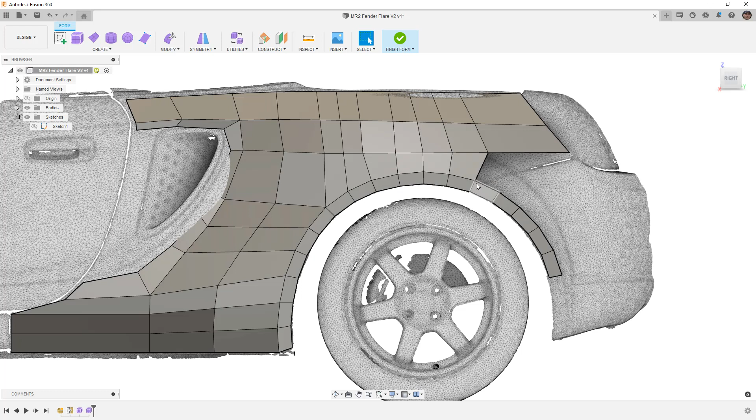Not something we need to do at this stage, but it's something we'll want to come back and make sure we work on, because this one kind of goes out to the left, back to the right, then up. This one goes pretty straight. This one sort of comes into the right slightly and then up to the left. And then these ones sort of bounce around.

So if we need to transition from a completely straight line to sort of an arrow or a V, we want to do that gradually.

So we're already at 45 minutes, and I know this process takes quite a while, but I do think it's important. Now, if I were to just model this without discussing all these little points, it's probably a 10 or 15-minute process to get to this stage. So it's obviously much quicker when we're not discussing it.

It's also much quicker if you have an idea of what you want something to look like. If you have a sketch or a reference picture, it can give you a good idea of where detail needs to be and where you can avoid it.

We're not done. Obviously we need to do a little bit more work. So I'm going to try to speed through a little bit more at this point and wrap the end of this video up. But I'm going to try to discuss everything I'm doing and why.

I want to extrude this out. I'm going to scale it vertically, and again we can manually put in 0 here. What I'm looking to do is build the end of the flare. So I want to carry this down, all the way to here. And again, we're going to end at the bumper.

We're going to use kind of like that 80s DTM look, or those old Porsches and other old cars that have those massive flares on them to fit huge tires, where you can still kind of see the stock body underneath.

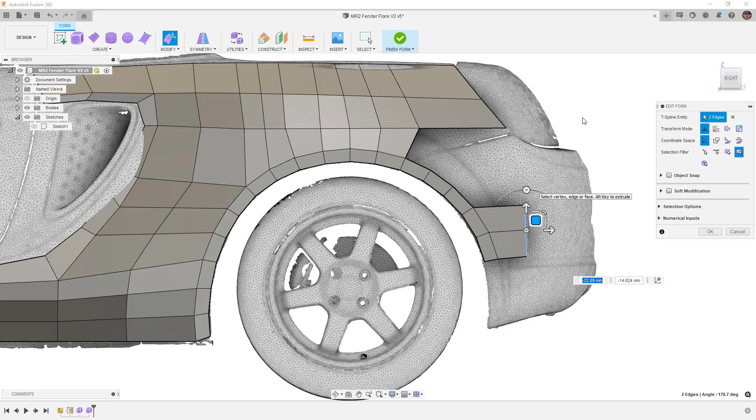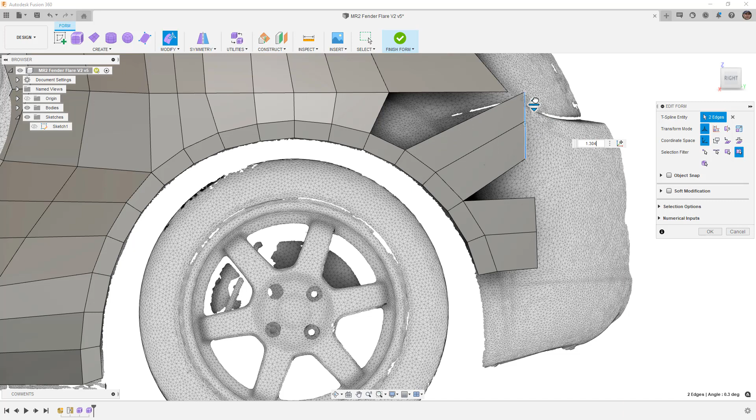So now that we have this edge, we need to figure out the rest of these and how to connect them. I'm going to skip this one because I already have this stuff patched here, and I'm just going to take these two and extrude them out, scaling them in the Y direction, then vertically in the Z direction, and just sort of move them around.

So what I'm thinking here is that these obviously need to connect, and I'm looking to see how many faces are going to be over here. We've got 1, 2, 3, and 4 if we connect these two vertices together. I think that's going to be the best option.

So, modify, weld - going to move this new one over to the first one because I know that's straight back. Then I'm going to move this to here. I'm happy with its location. And now that I've got that single boundary, I'm going to say fill, let it fill that hole, and now we're good.

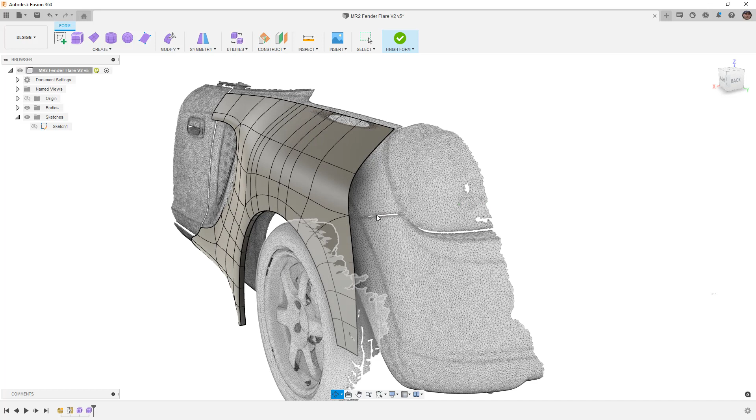Again, smooth display from the back - got this massive sort of opening or cavity. Obviously we'll want to connect it back to the body, but for the massive opening, let's go ahead and use Control 4 to get rid of the edges.

You can see there are some creases here that we need to work on, but that's going to be the general shape. And as we're looking at this, you can see some areas like this right here have got sort of this weird thing happening graphically.

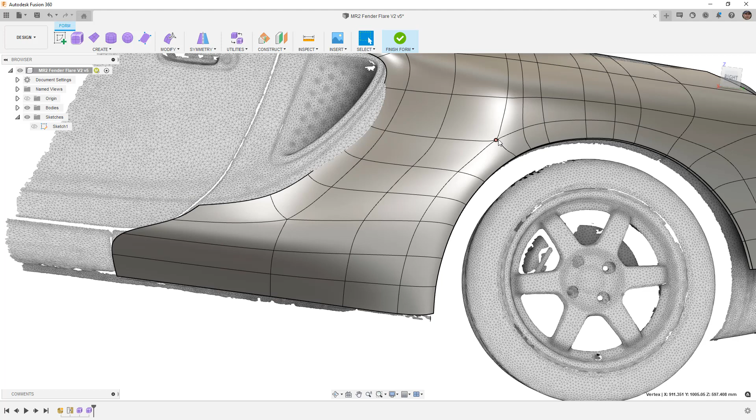If we bring the edges back, that's our star point. And that's one of those reasons why we try to avoid those star points, is because they will cause problems like that. And a way for us to get around this is to use utilities and repair body and see if we can let it fix that star point, let it auto fix.

Sometimes there are other ways that we can do it, but we might need to consider changing the patch or changing the edge layout and the edge flow in order to alleviate that problem. That is a problem for future us. There are a couple issues that we need to fix, but what we've done at this stage is we've roughed out the shape. Now, the next part of the process is to go back and refine it.

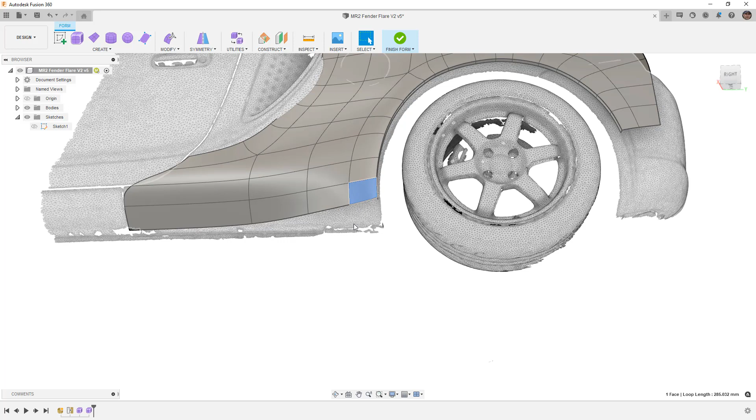So we're going to be adding detail to connect the bottom of the flare underneath the car, which means pushing some of this back. We're going to connect the back to the car, push it back over, and then we're going to begin fixing some of the patches, fixing some of the layouts, and then adding in those details. And the very last step of this process is going to be to pull or attach what we have here to the mesh.

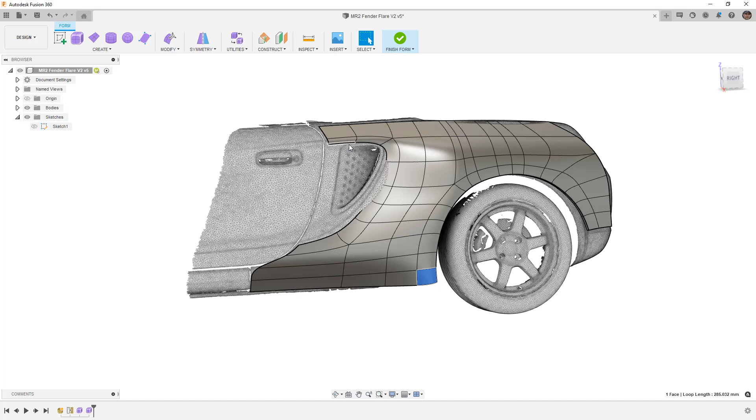So we're trying to keep it fairly close to its final position, but we're not attaching it yet. We could, because it's not parametric, so it could be undone. But you can see that we're just sort of mimicking the body lines, and we're using that as sort of inspiration. But here is the flare. You can see that it's sort of coming away from the body. Everything looks pretty good so far.

And that's almost an hour of us going through this process. Hopefully it's helpful. Hopefully you can see the concept phase, the box layout, the approach of creating the fender lip, sort of extruding it out, and then building the rest of the shape out before we connect things together.

And hopefully, if you really just take away one thing, is to understand that there are plenty of times where we're just going to have to delete some of the stuff we've done and sort of reconfigure it. And that's fine. It doesn't have to be a one and done scenario. There are very few times that I have ever gone through the process and done something perfectly right the first time and not had to go back and make adjustments and make changes.

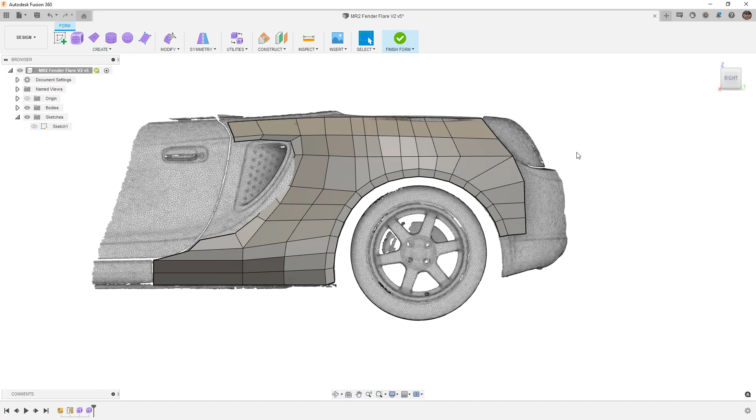So at this stage in the game, let's leave it here in this sort of initial shape, roughed out concept phase. The next stage, we're going to try to fix or alleviate some of the surface issues that we have. So things like the star point here, we're going to potentially add some more divisions to help the shape, because we've got this one large face here, and then we've got all these that are sort of competing for geometry. We could crease or add more edges when we get a little bit closer.

And then once we get all of those little details ironed out and we're happy with the layout, that's the phase where we go back and start to add extra edges to control geometry and add more features or more details to really make this a unique item and not just look like a blob stuck on the side of the car. So that's going to be the fun part when we get there. We're not quite there yet, and if we add any detail at this stage, we're really just making our job that much more difficult.